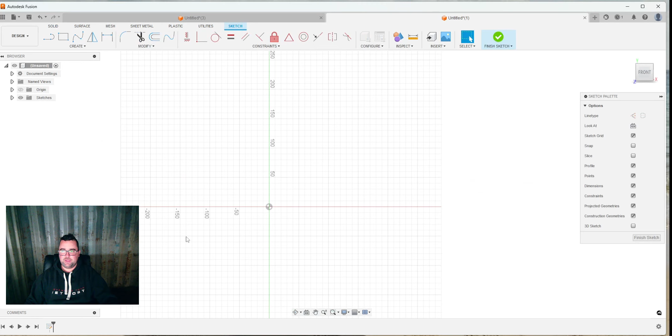We are back for another Fusion 360 tutorial, and this time we are going to do rectangular patterns and how it can be used to make your life easier when you're making parts. So what we are going to do is, as always, we're going to create a sketch. We're going to click any plane for this one, and we are going to use a 2-point rectangle.

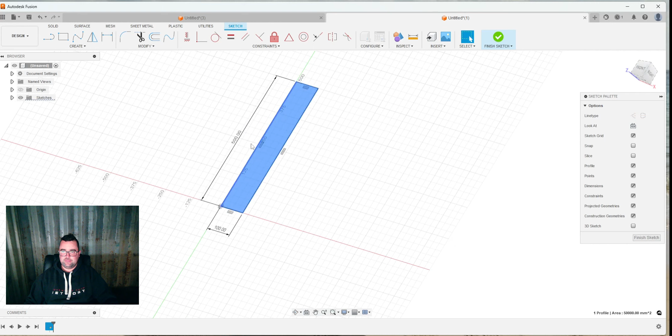And let's just do something that is 100 mil wide, and you press tab. That'll take you to the other dimension, and let's just make it 500. Cool. Now let's make this a 5 mil thick component body. Sorry. Let's make it 5 mil thick. Okay. Rightio, so we've got this and we want to create something that we can pattern.

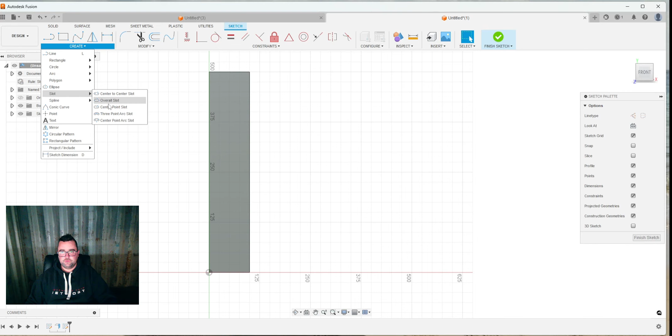Now what I want to do first is, this will be a bit of an introduction into slots as well as rectangular patterns. So let's just do center point slot first of all. A center point, I want it to be in the center. So you just hover over the center of the part and then bring it up. And now let's just go 10 mil this way and

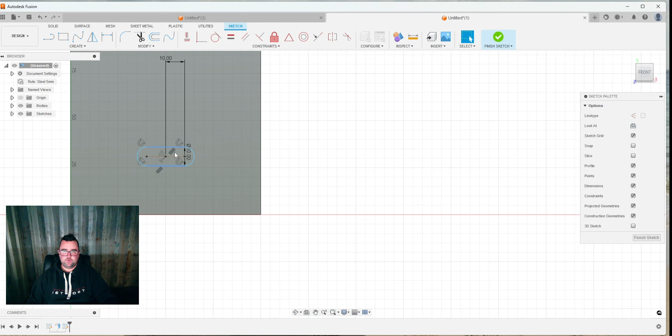10 mil this way. All right, so we've got a slot that is 10 mil from the center to the center of the circle on the end of the slot, as well as 10 mil width. So what we want to do is we actually want to click on this. Let's extrude it, 10 mil. All right, so we've got one 10 mil slot.

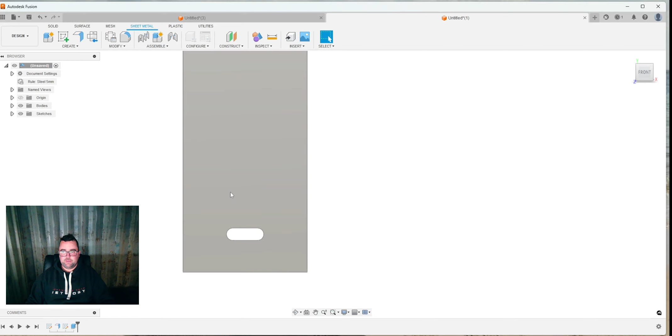Now, this job needs multiple 10 mil slots all that way. Now, I'm not going to draw a line up a bit, do another slot, manually draw a line up a bit, do another slot. So what I want to do is I want to create a pattern with this. Now, a rectangular pattern can also be a straight pattern. So let's click on rectangular pattern.

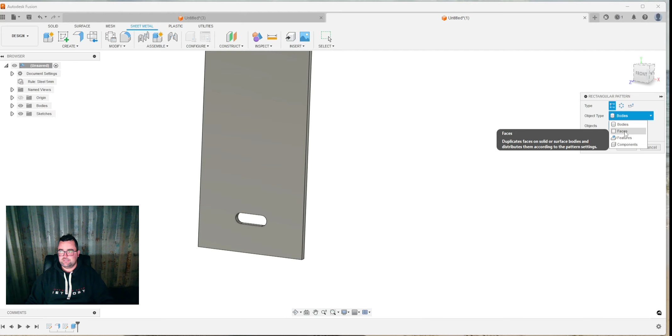As always, with this one, we don't want to do the body, we just want to do faces. So let's click faces. Now I'm just going to grab and pull that across. That's going to select all the faces, because as you can see, there's one there, one there, one there, and then one that I'd have to rotate the part to get. So it's a bit of a time-saving exercise.

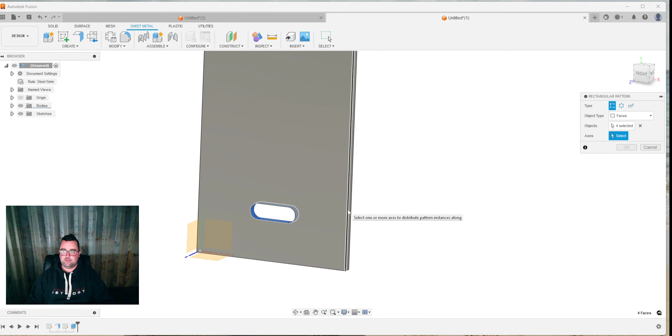And the axes, I can press that one or that one. You'll see why in the next screen. So I'm just going to click this one. Now, if I was to click the bottom one, you'd come up with exactly the same scenario. The only time it would matter is, let's just say this came off at like a 45-degree angle, and I wanted those parts to go off at a 45, then obviously you'd have to click the 45-degree one, but it doesn't matter for now.

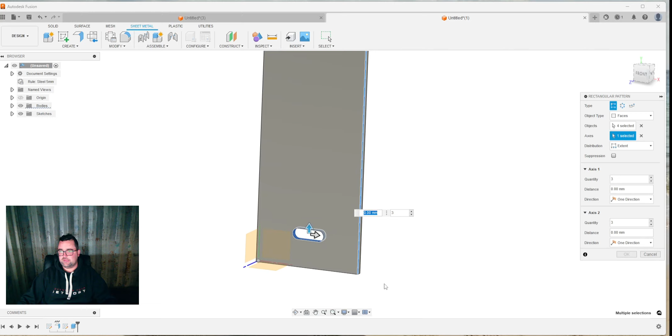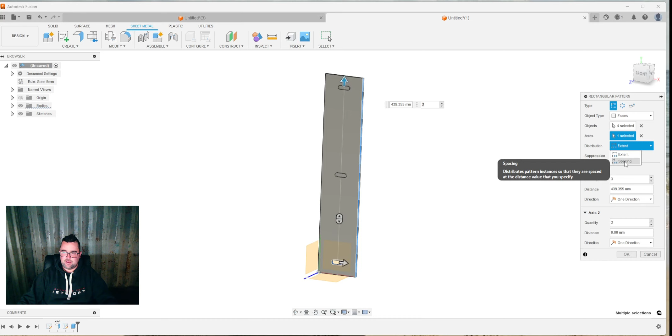So we want to have another one up here. So just simply drag it up. Now that gives us 3. You can also do it by spacing. So let's just say if you wanted to do spacing every 30 millimeters, you could click spacing and then enter 30 millimeters, and it would do 3 of these parts 30 millimeters apart. But we want to do extent.

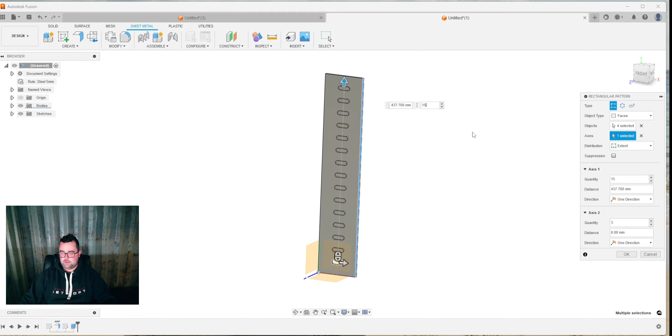So we've got them up like that, and we can just click up until we have the right amount of slots, 7, 8, 9, 10, 11, 12, and you can just keep going. So let's just say 15 and press enter. Now I didn't drag this side one out, but if I did, that's what happens. But we don't want anything on that axis, so let's just get rid of that. Press OK, and there you go. That's how you make a single line type thing.

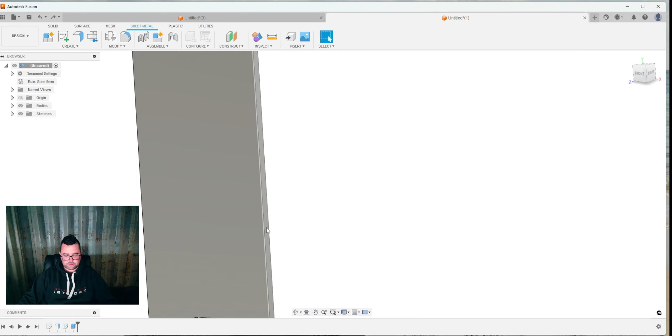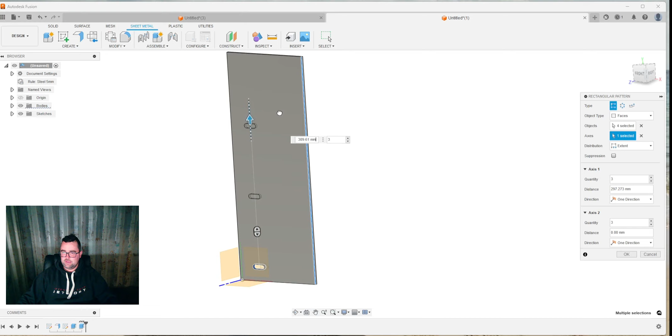All right, so I've just gone back and I'm going to make this before I make the pattern, because we can't go back and edit the pattern because we extruded this afterwards. So we'll pretend we're making a different kind of pattern. Faces, select the object, axes, select the straight one. Now we're going to go up. So it's about the same. We're going to load it up. 4, 5, 6, 7, 8, 9, 10.

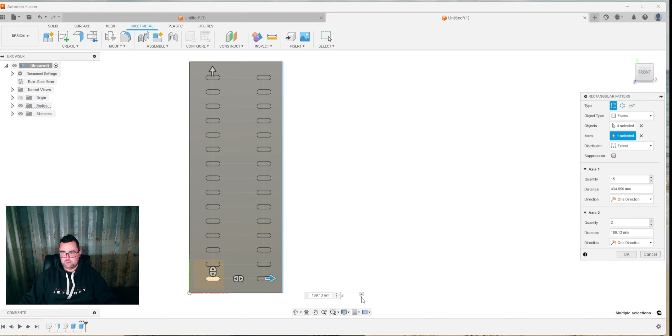Cool. Now we want to bring it out 3 as well. And you can make it 4. See how they're starting to overlap on 5? It's probably not ideal. Make it 2. Let's just make it 3 because it looks like 3 is good. So there you go. That is rectangular pattern. So basically, it'll just do anything on either of those axes. It won't, however, stagger parts.

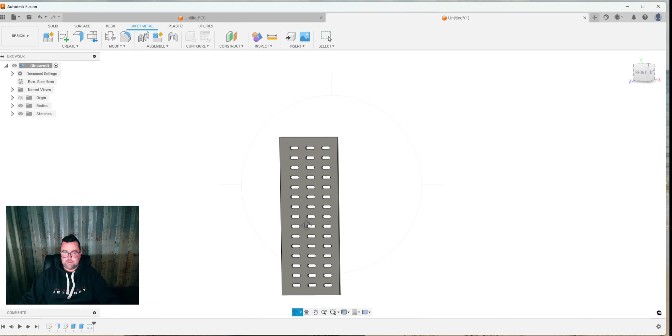So, for example, if you wanted them like that, and the next one down in the middle, and then the next one up, you'd have to create another set of slots that intersect them, and then do another pattern to go in between it. So that's a cool way to make some kind of a grill or whatever, just using that kind of pattern. For example, if I wanted to go and get this laser cut now, I'd just flat pattern this.

And then up here, export flat pattern as DXF, click that and just save it anywhere.